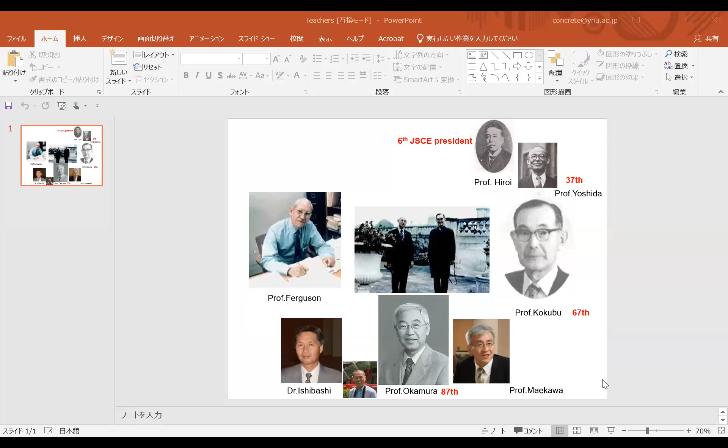I hope some of you have briefly read the journal paper written by Dr. Ishibashi. Today we will start studying his paper.

He has retired from the railway company, but he is still working as a special advisor for a railway consulting company. He was, or is, the top railway engineer. Professor Maekawa respects him too. He belonged to East Japan Railway Company, JR East, the biggest railway company in Japan. Now it's a private company, but before that he belonged to the National Railway, Japan National Railway.

He is also one of my teachers. I learned lots of things, philosophy, knowledge, and ways of thinking from him and his work. That's part of me. I also learned from Professor Okamura and Maekawa Sensei, etc. So you are learning those philosophies through me. He is Dr. Ishibashi.

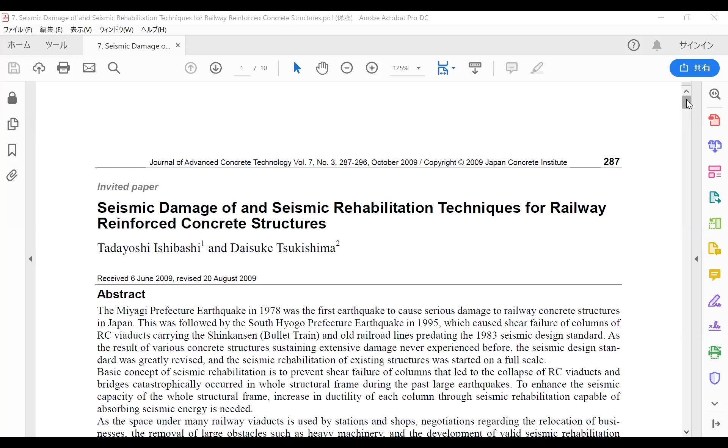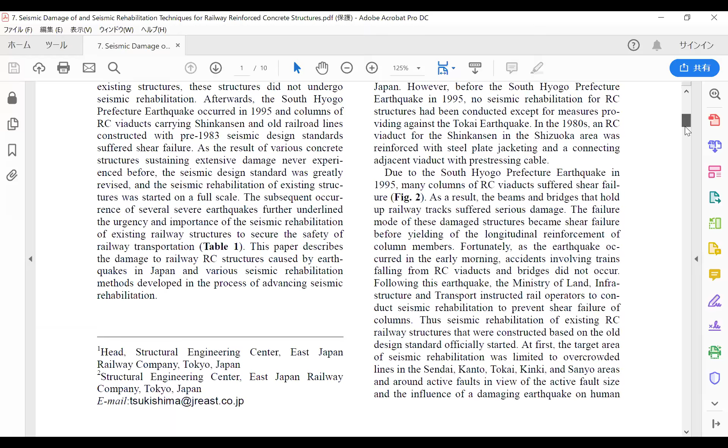Do you know Sendai? No, okay. So after Corona, COVID is settled, please visit many towns or cities. Japan has so many fascinating cities or areas. Please do not stay only in Yokohama. So Sendai is here, it's a kind of capital of the Tohoku area. So Miyagi Prefecture covers this area.

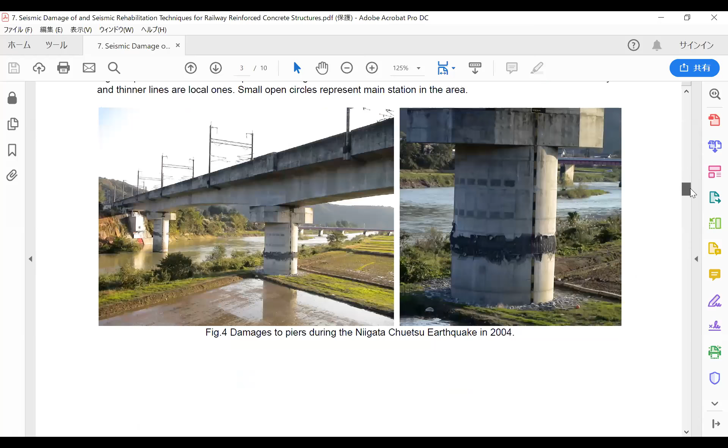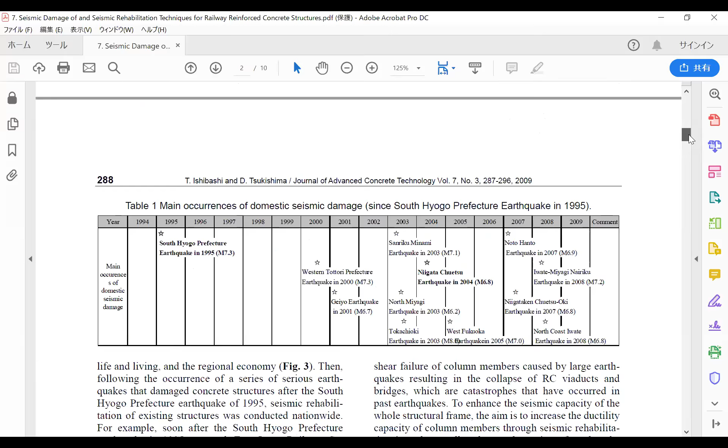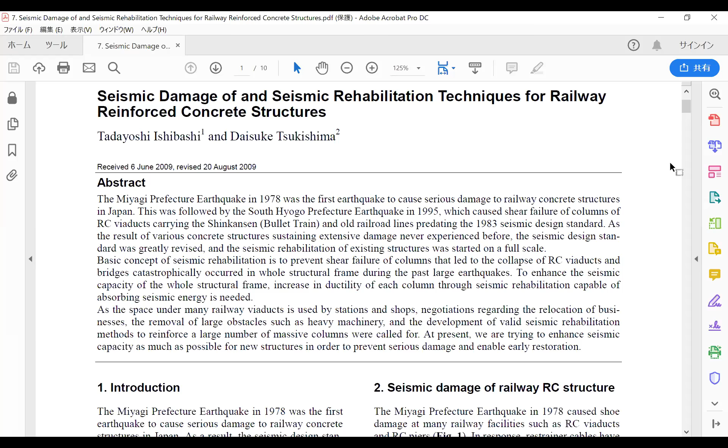Figure 1 is related to that information, the Miyagi Prefecture earthquake. So in 1978, at that time, Dr. Ishibashi was engaged in the construction of the Tohoku Shinkansen in this region. It was under construction, that's why he experienced this serious, severe damage at the site.

So he gradually accumulated knowledge about damage, how to repair, how to restore, how to improve seismic performance for new structures, etc. So he is a real engineer. Wichuda-san, go ahead.

This was followed by the South Hyogo Prefecture earthquake in 1995, with the failure of columns of RC viaducts carrying the Shinkansen bullet train and old railroad lines, predating the 1983 seismic design standard, as a result.

So this is the very famous Kobe earthquake in 1995. One of the very important keywords in this seismic design lecture is shear failure. Shear failure is a very important keyword, right?

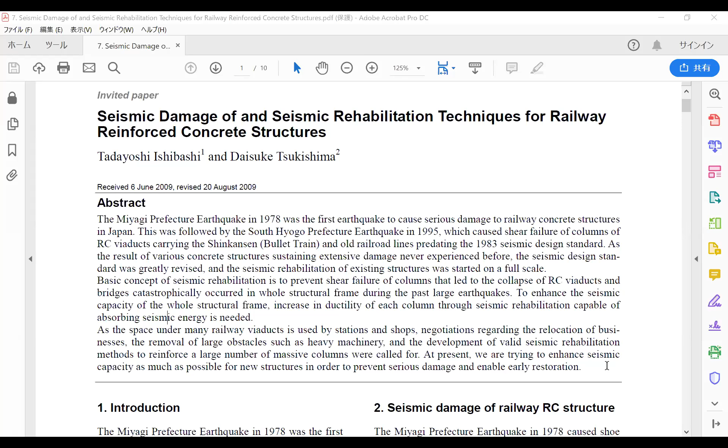As the space under many railway viaducts is used by stations and shops, negotiation regarding the relocation of businesses, the removal of large obstacles such as heavy machinery, and the development of valid seismic rehabilitation methods to reinforce a large number of massive columns were called for.

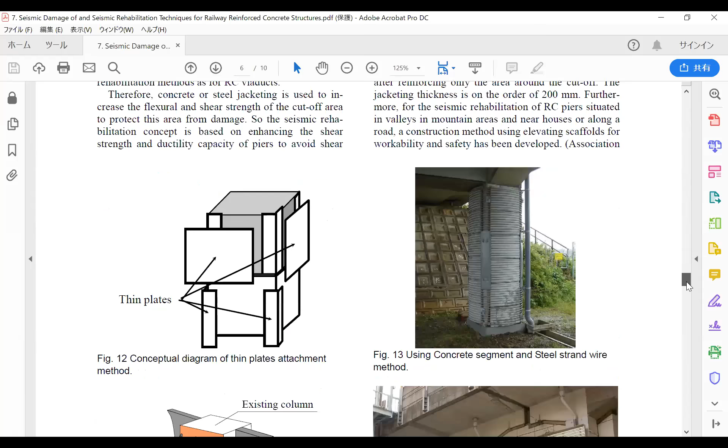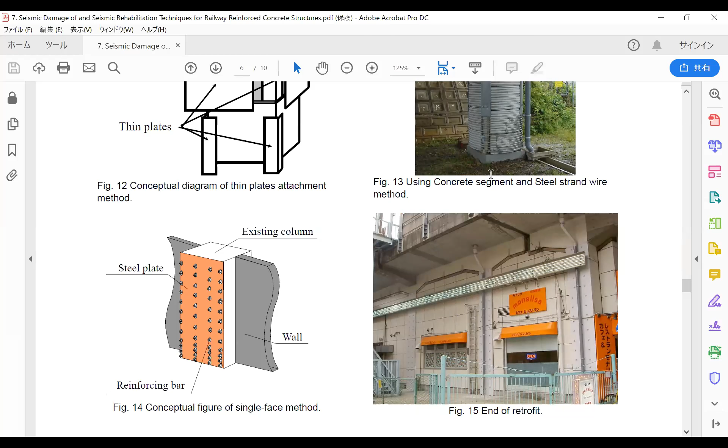So, for example, this kind of situation - it's not so clear, sorry. This is better, okay? I think you can find this kind of situation so often in Japan. The space under the viaduct, RC viaduct, is used for shops, etc. In this case, maybe a restaurant.

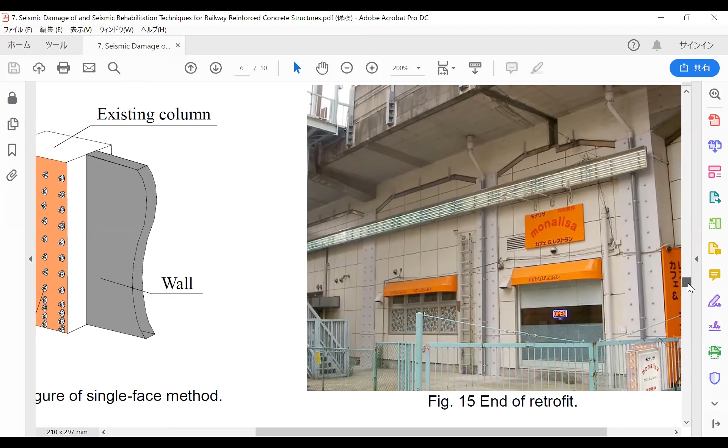Cafe and restaurant, Mona Lisa, open. So we cannot disturb the operation of these shops, that's why special techniques are needed. But it's a kind of typical Japanese way of thinking. For solving these practical problems, many techniques are developed. So I think it's a very typical Japanese situation.

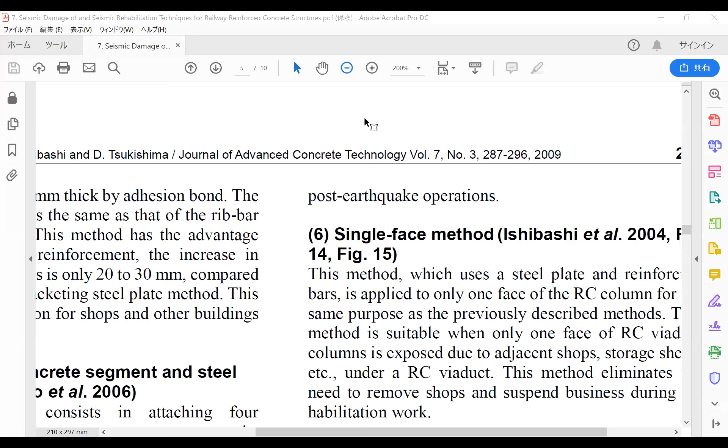The final sentence: At present, we are trying to enhance seismic capacity as much as possible for new structures in order to prevent serious damage and enable early restorations. So improved seismic design for new structures and seismic rehabilitation, retrofitting, are both treated, explained, or discussed in this paper.

Please try to learn as much as possible from this interesting and practical paper. Okay, can I go ahead? Or any questions so far?

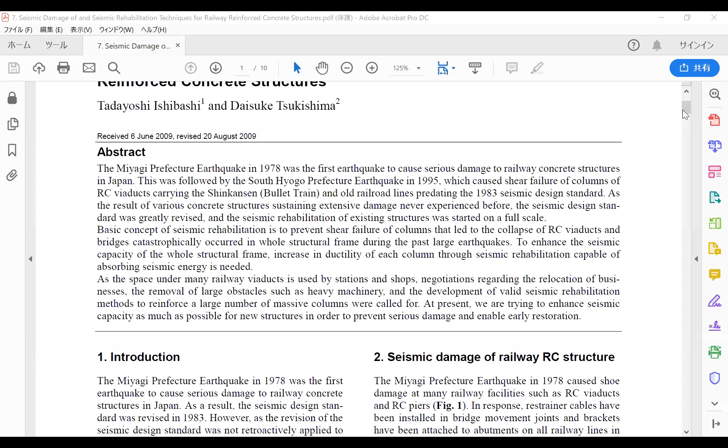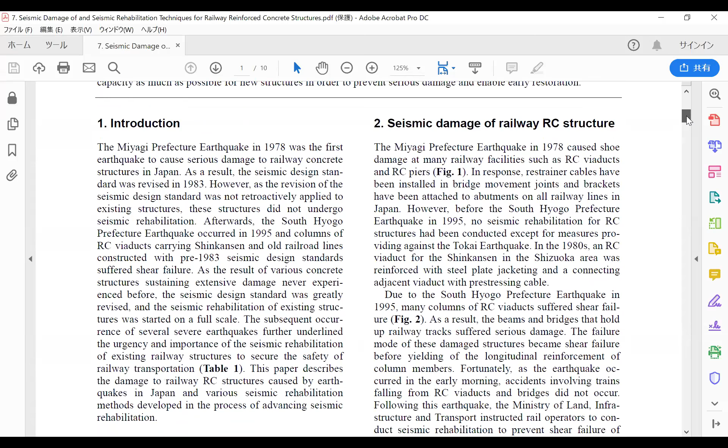1978 was the first big lesson for my civil engineers, or railway engineers. In Japan, you should bear in mind that the building engineering and building design code and road or railway engineering code are different. In this lecture, I will tell you the history of railway engineering, which is a bit different from building design history, but I think the basic concept is not that different.

In railway engineering, 1978 was a very big lesson from an earthquake. That's why the design standard was revised in 1983 - this was the first big revision in railway engineering. After that, in 1995, another very big lesson came from the Kobe earthquake, and we made a further revision.

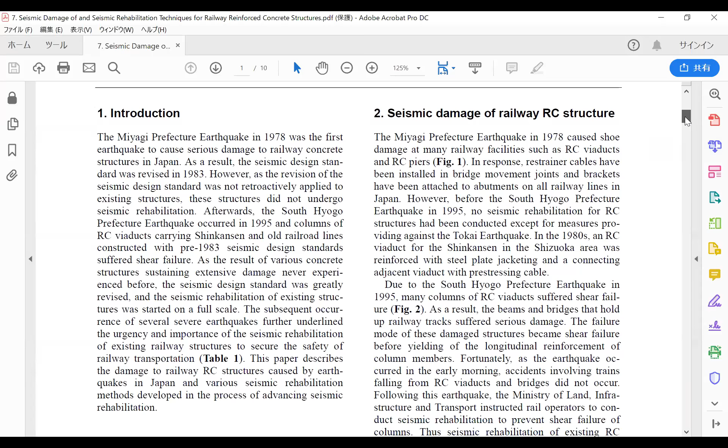Okay, so chapter 2, seismic damage of railway RC structure. Due to the Kobe earthquake in 1995, fortunately, as the earthquake occurred in the early morning, accidents involving trains falling from RC viaducts and bridges did not occur, as I explained to you.

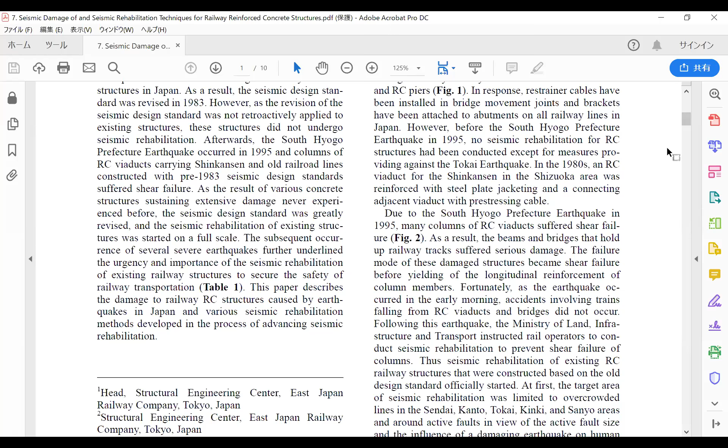Please read the first paragraph of chapter 2, about the Miyagi Prefecture earthquake. The Miyagi Prefecture earthquake in 1978 caused shoe damage at many railway facilities, such as RC bridges and RC piers.

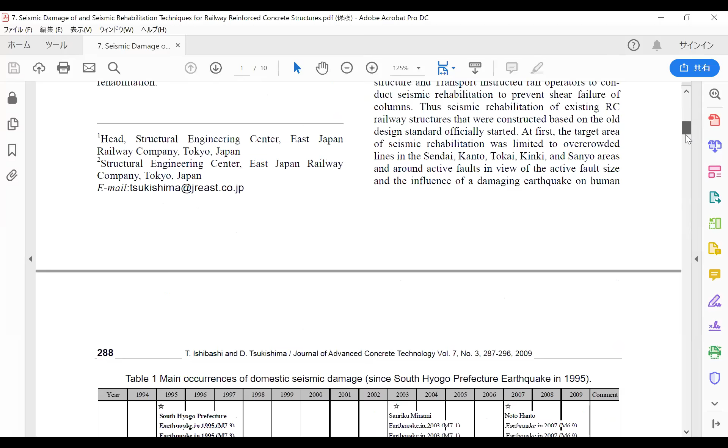This is a part of shoe, right? Part of support. I don't know the situation in other countries, but in Japan, especially in old structures, these metal devices were broken in the Miyagi Prefecture earthquake in 1978.

Do you know the reason? It's cast iron. Cast iron is very convenient to make any shape of device, but it's different from steel, it's brittle. That's why cast iron bearing devices, shoe devices, were broken.

So recently we never use cast iron. Is it clear?

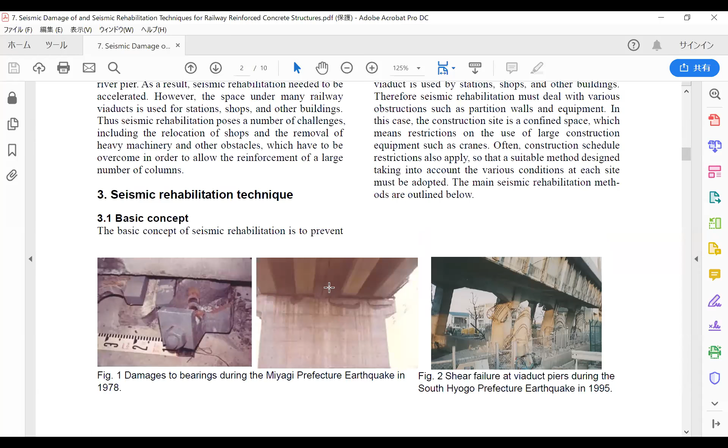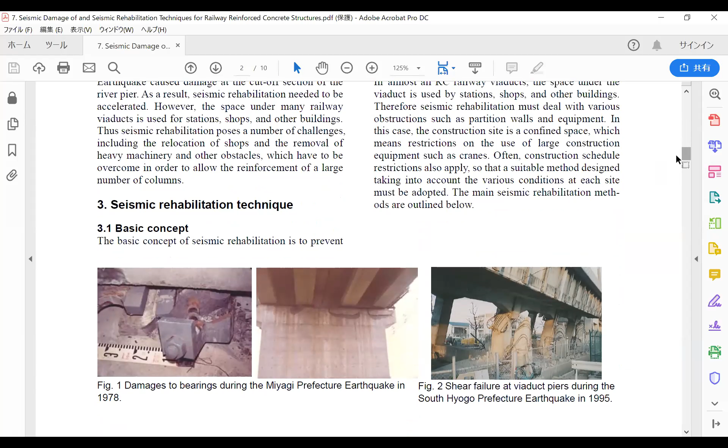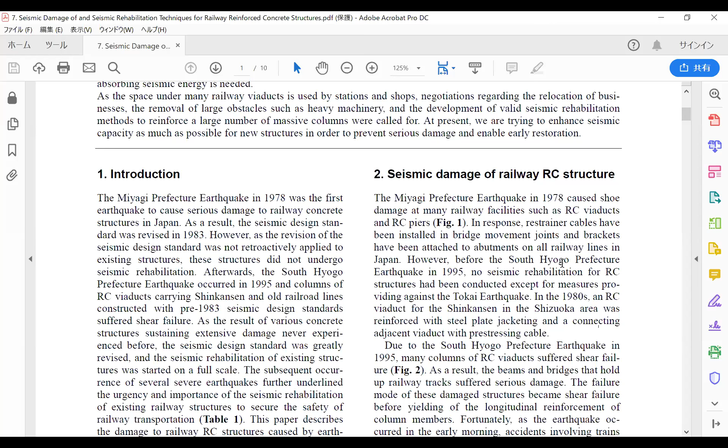In response, restrainer cables have been installed in bridge movement joints and brackets have been attached to the abutments on all railway lines in Japan. However, before the South Hyogo Prefecture earthquake in 1995, no seismic rehabilitation for RC structures had been conducted, except for measures providing against the Tokai earthquake in the 1980s, an RC viaduct for the Shinkansen in the Shizuoka area, which was reinforced with steel plate jacketing and connecting adjacent structures with pre-stressing cable.

Thank you. So many local names of cities, so it's a bit difficult for you, but if you're interested, please try to learn. Before 1995, almost no seismic rehabilitation had been done, except for some areas. Do you know Shizuoka?

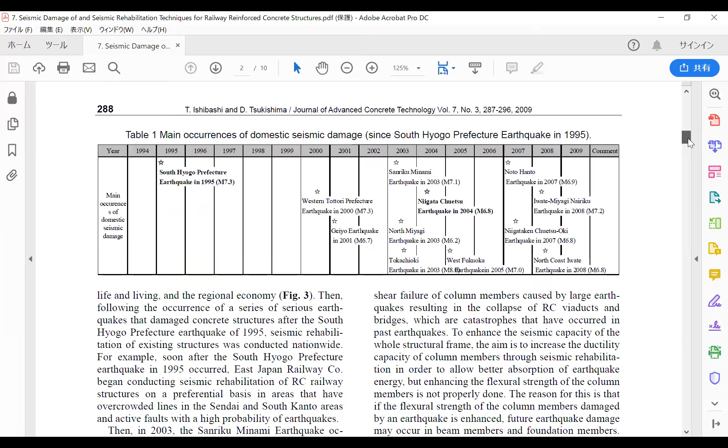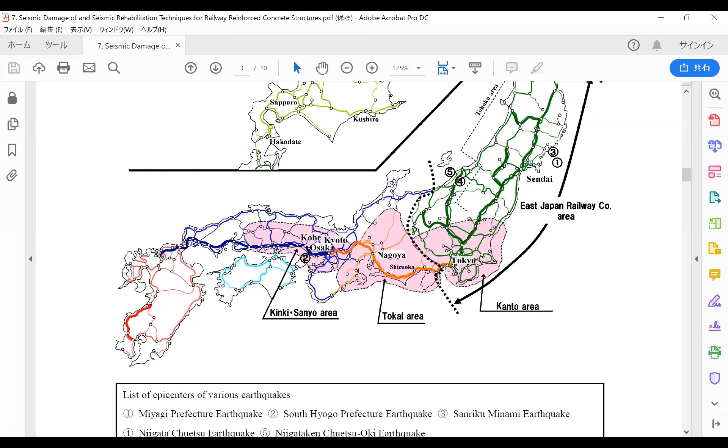Only near the Shizuoka area was seismic retrofitting conducted. Why? I showed the Google map. Please wait for a while.

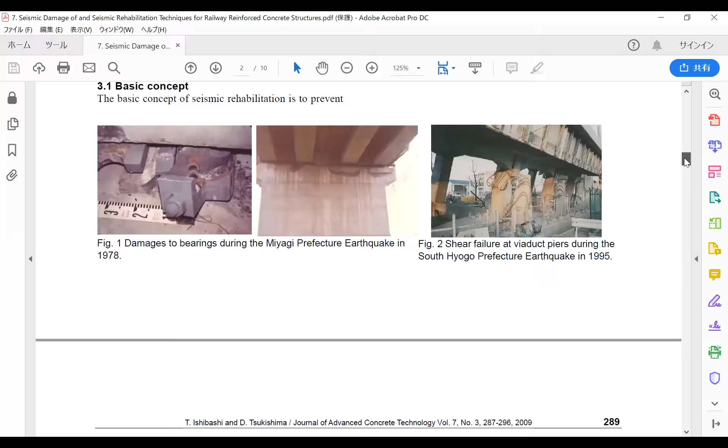Again, this area, the Shizuoka area, is on the Tokaido Shinkansen, the first Shinkansen connecting Tokyo and Osaka through Nagoya and Kyoto. This is the first Shinkansen.

Now you have a better knowledge. However, before the Kobe earthquake in 1995, no seismic rehabilitation had been conducted except for some countermeasures against the Tokai earthquake. In the 1980s, RC structures for the Shinkansen in the Shizuoka area were retrofitted, reinforced with steel plate jacketing.

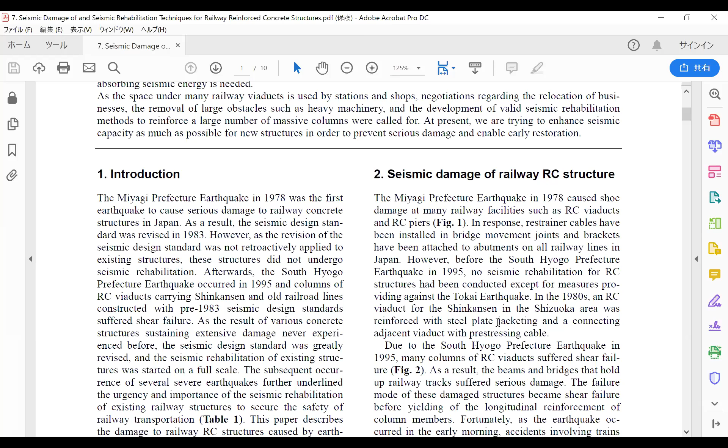So of course, many other conventional and local lines were in dangerous situations with the risk against earthquake. Very dangerous situation. So a bad design code, or a design code without sufficient knowledge, will cause this kind of non-resilient situation.

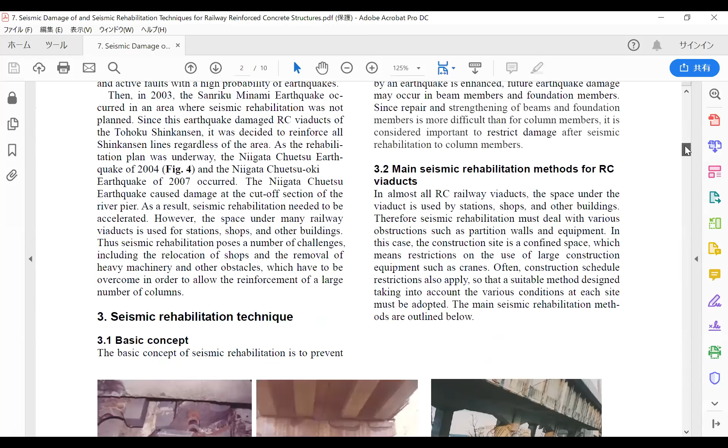Following the Kobe earthquake, the Ministry of Land, Infrastructure and Transport (MLIT), formerly Ministry of Transport, instructed railway operators to conduct seismic rehabilitation to prevent shear failure of columns. At first, the target area of seismic rehabilitation was limited to overcrowded lines in Sendai, Kanto (Tokyo area), Tokai, and Kinki (Osaka area), etc.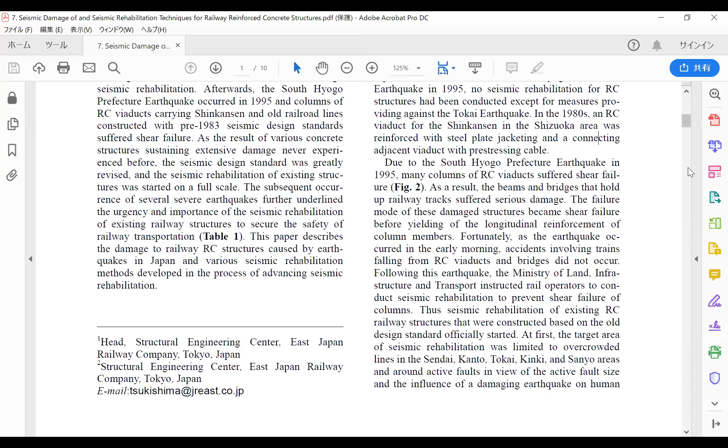It takes time. After that, in 2003, eight years after the Kobe earthquake, another earthquake happened, in a local, rural area. Actually, at that time in 2003, I was working for a railway company, so I experienced this earthquake as a railway engineer.

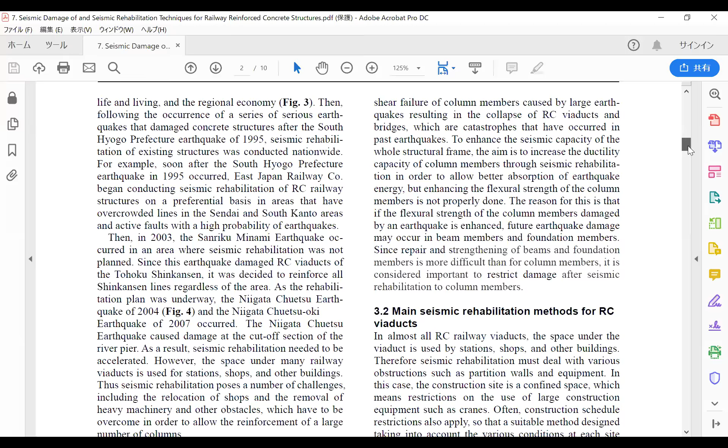Where is this earthquake? This one, number 3, the Sanriku Minami earthquake, happened in 2003. It's away from Tokyo, away from Sendai, but severe damage happened in a local area.

We should understand that railway, especially railway, different from roads, is a line infrastructure. So when some portion, some points, are damaged, the line doesn't work. But the railway company, JR East, recognized that not only city areas, but all the structures should be retrofitted. Otherwise, railway infrastructure as a line doesn't work appropriately. That's the decision.

That's a very big decision for moving toward a resilient country.

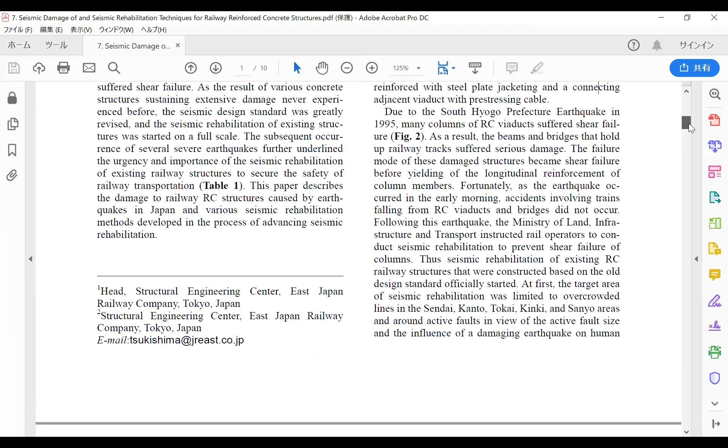That's the rough history of seismic retrofitting. It's step-by-step retrofitting, but we are still continuing now.

So I will finish this explanation by adding one more piece of information. As you remember, the big earthquake in 2011, March 11, nearly 10 years ago, damaged almost all the coastal lines in eastern Japan, both by earthquake and tsunami. I almost believe that without those retrofittings, very many structures must have collapsed. It's a kind of nightmare.

We could be in time. We could avoid very severe collapse of RC viaducts. That's a kind of result obtained by civil engineers' efforts. Again, we learned so much from the Kobe earthquake.

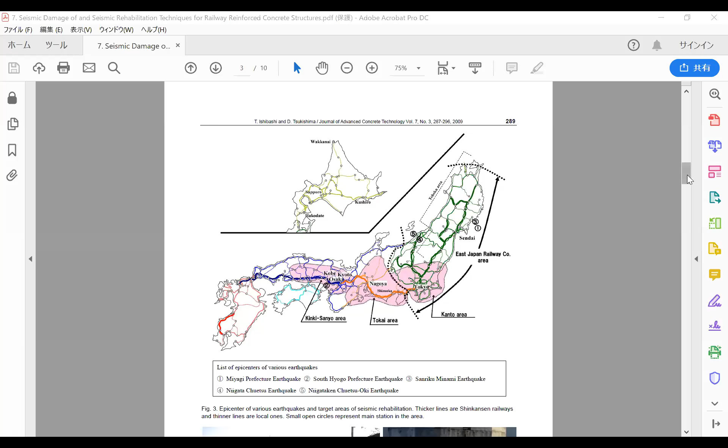Any other question? Okay, let's go ahead.

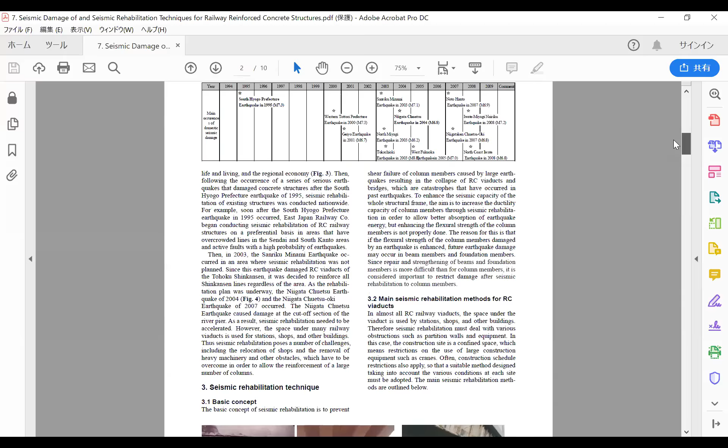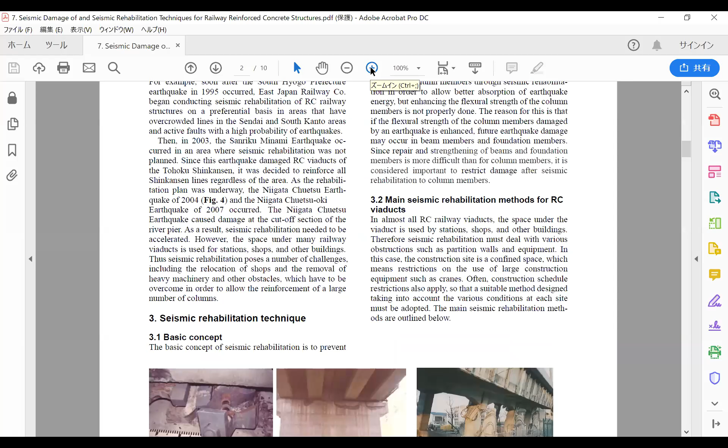Please read this part: Basic concept for seismic rehabilitation, section 3.1, Basic Concept.

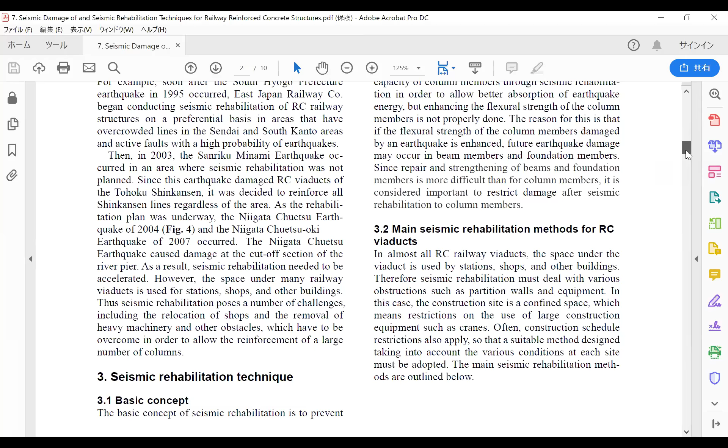The basic concept of seismic rehabilitation is to prevent shear failure of column members caused by large earthquakes, resulting in the collapse of RC viaducts and bridges, which are catastrophes that have occurred in past earthquakes. To enhance the seismic capacity of the whole structural frame, the aim is to increase the ductility capacity of column members through seismic rehabilitation, in order to allow better absorption of earthquake energy. However, enhancing the flexural strength of the column members is not properly done.

The reason for this is that if the flexural strength of the column members damaged by an earthquake is enhanced, future earthquake damage may occur in beam members and foundation members instead. Since repair and strengthening of beams and foundation members is more difficult than for column members, it is considered important to restrict damage after seismic rehabilitation to column members.

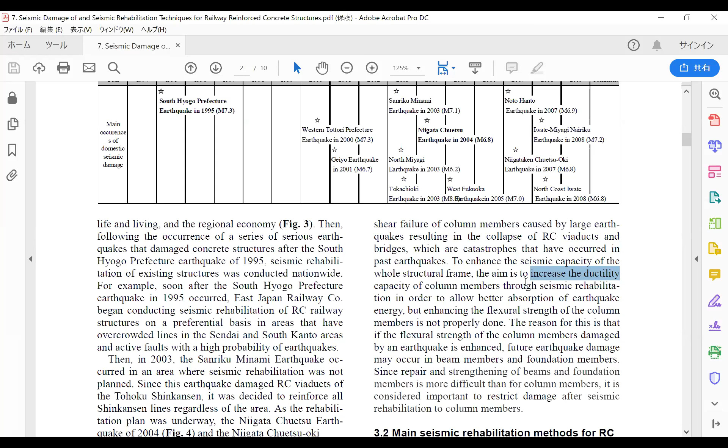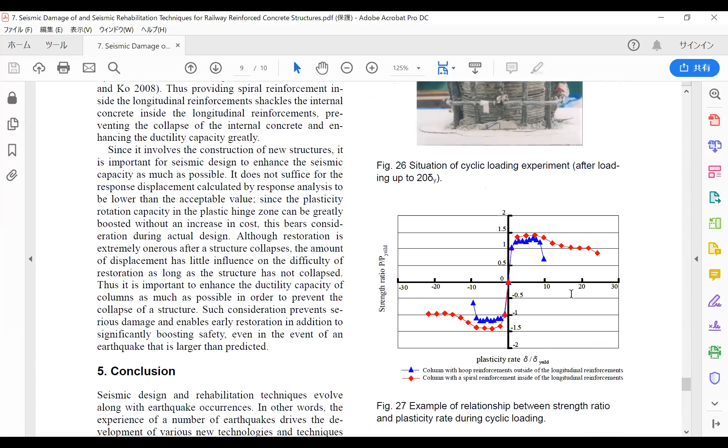Okay, let's start from this one. What's ductility? We should jump to the final figure. You can see figure 27. I'll explain, let's magnify the figure. So, what's this figure?

Vertical axis is strength ratio, P over P yield. What's horizontal axis? Plasticity rate, delta over delta yield.

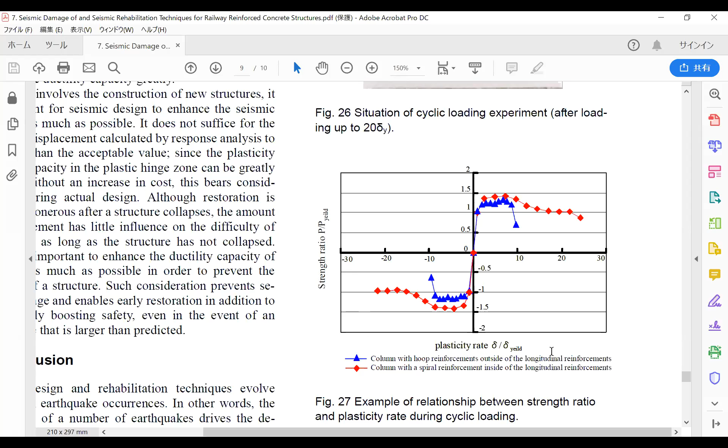Have you seen the column test? Where is it? Today I cannot use the whiteboard, so... it's a bit difficult to explain.

I have not shared this PowerPoint file yet, but sooner or later I will share it. Can you see this PowerPoint file? Okay, so this is a column.

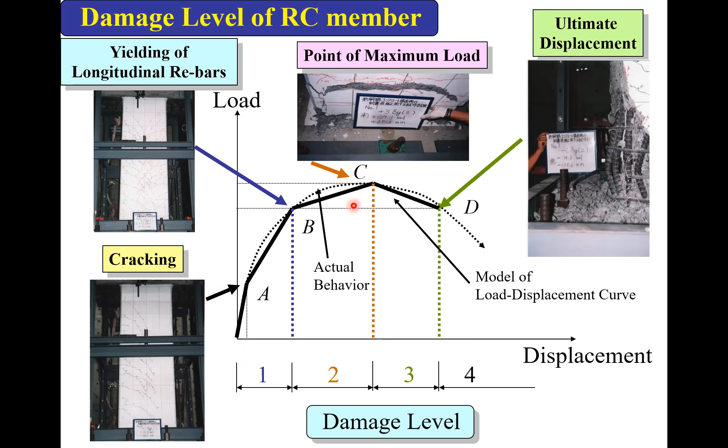I'll go back. This is again the load-displacement relationship, but it's normalized by yielding load and normalized by yielding displacement.

The red one is showing a larger displacement, so higher ductility. This is again the load-displacement relationship. So this area is showing the seismic energy absorption performance. The reinforcing bar is already yielded, but by this large deformation, seismic energy, earthquake energy can be absorbed. This is ductility.

Shear failure can happen like this. Without showing ductile behavior, shear failure suddenly happens, sometimes before reaching yielding load. So in this graph, before reaching 1.0, at around 0.7 etc., it suddenly fails in shear. So almost no energy absorption. It's very brittle and very dangerous.

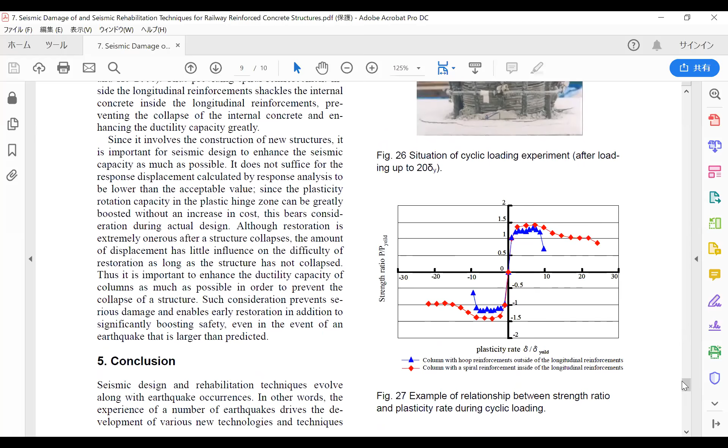Now, do you have some image about ductility? Okay, I'll go back.

You said in the column test - is it just axial load plus combined with something else? Yes, sure, we should apply the equivalent axial load. And how about horizontal? Both combined together, of course.

The axial load is kept constant. The horizontal displacement is gradually increased, applied to the column like that - this is the reverse cyclic loading, something like that.

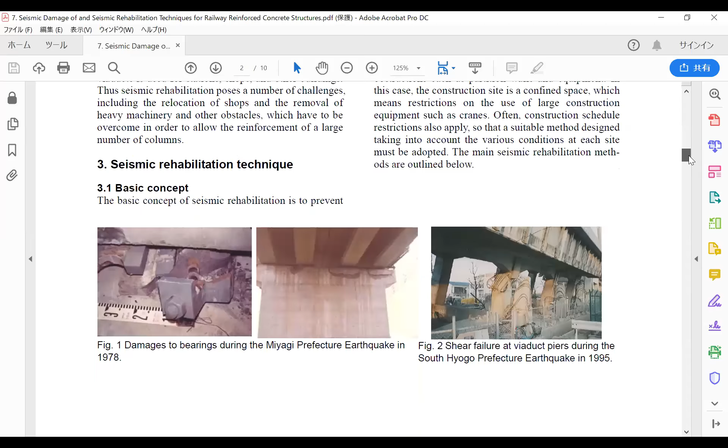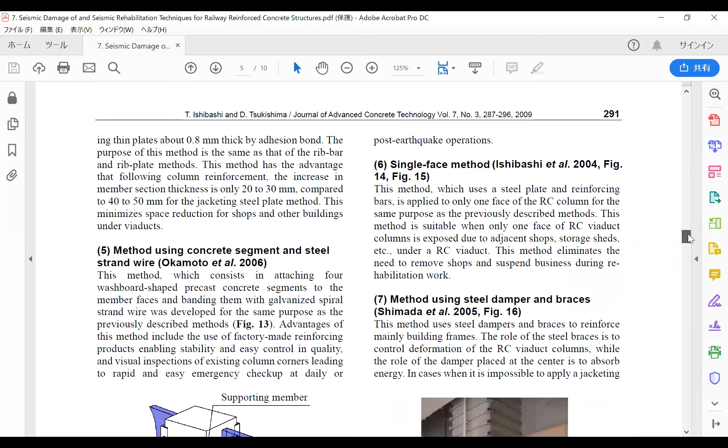Compared to that rib-bar method, this steel plate jacketing method is more common. It's also used to increase shear capacity. It's different from reinforcing bar, but these steel plates cover the original RC column.

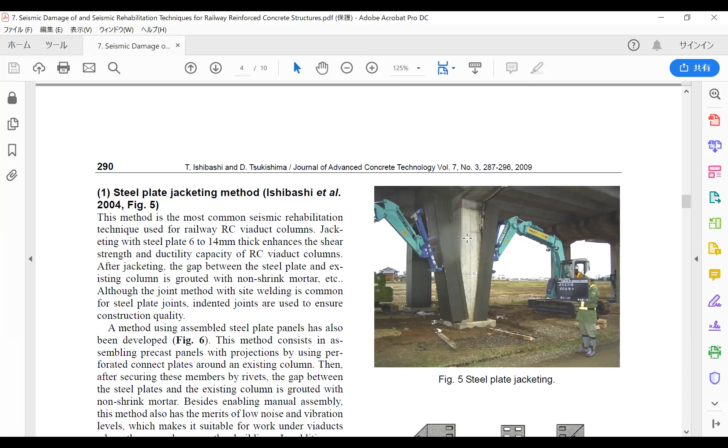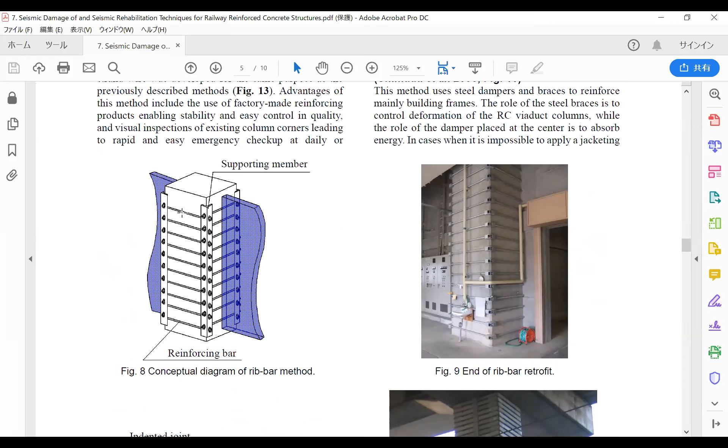But it's similar to the rib-bar method, right? It's discrete, separated steel, but if you connect it all, it will be like a steel plate. You can find construction machinery for this. Steel plate is very heavy, so in open space utilizing construction machinery, you can use the steel plate jacketing method.

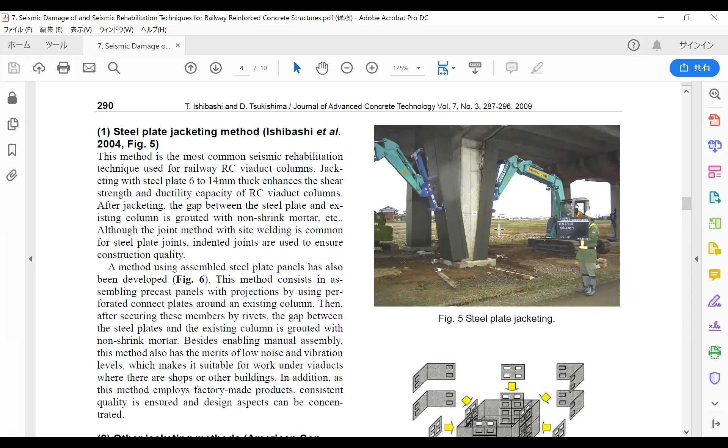But here there's a wall, so it's very difficult to break or demolish all this concrete wall. That's why only small holes are made, and reinforcing bars are manually installed, then tightened at the corners. For solving this kind of difficult situation, the RB method was developed.

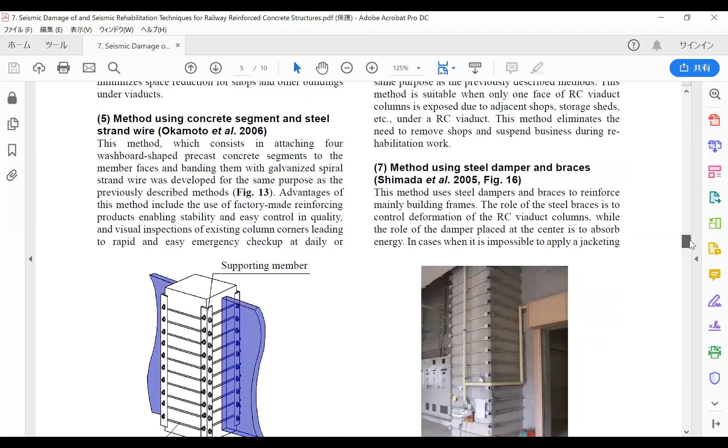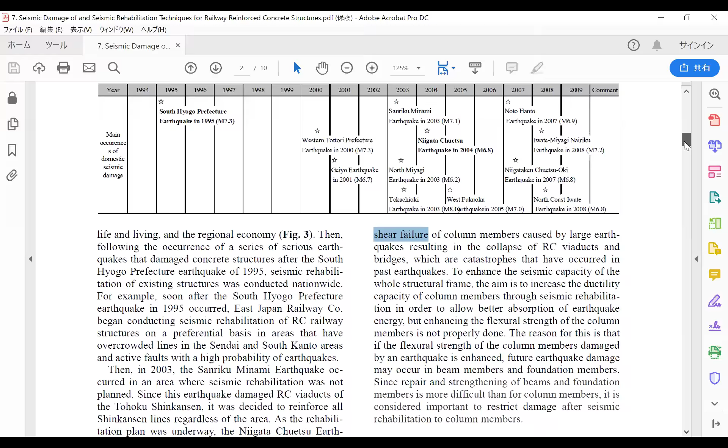This is the explanation about how to prevent shear failure. So, do you have any question?

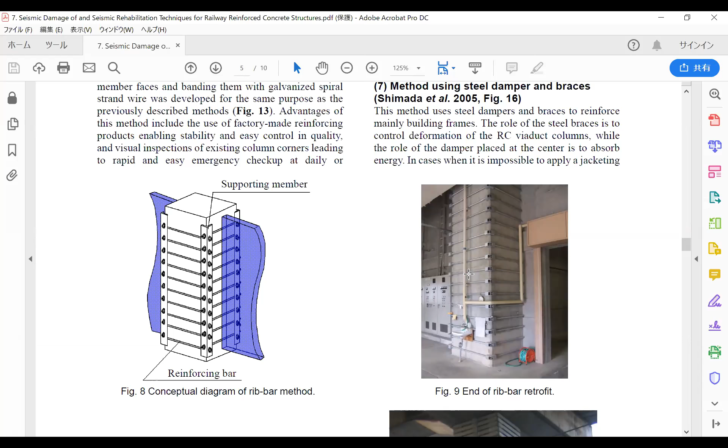Sensei, were carbon fibers also utilized as shear reinforcements? Yes, it's just like the steel jacketing method. Carbon fiber is one of the FRP sheets, and one of its merits is lightness.

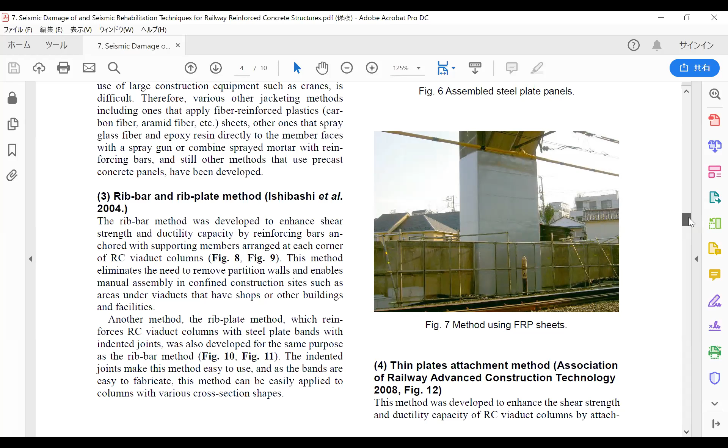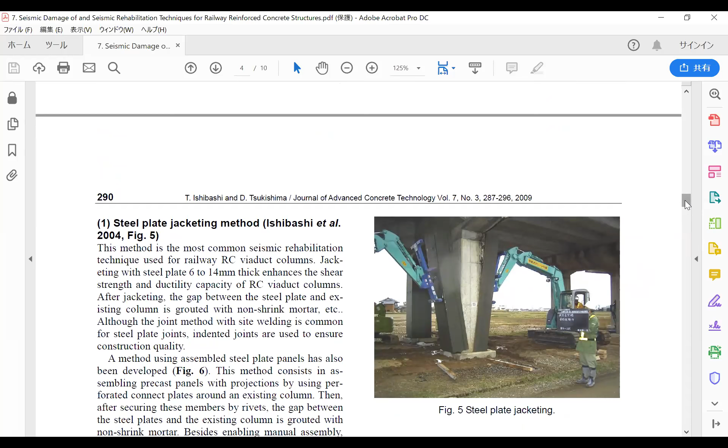So anyway, by utilizing those methods, shear strength is increased to prevent shear failure. We will go back to that important paragraph.

Next important aspect is this one. As I told you, shear failure should be prevented, but enhancing flexural strength should not be done. Again, flexural strength should not be increased or enhanced. Do you understand? Let's go back to steel jacketing.

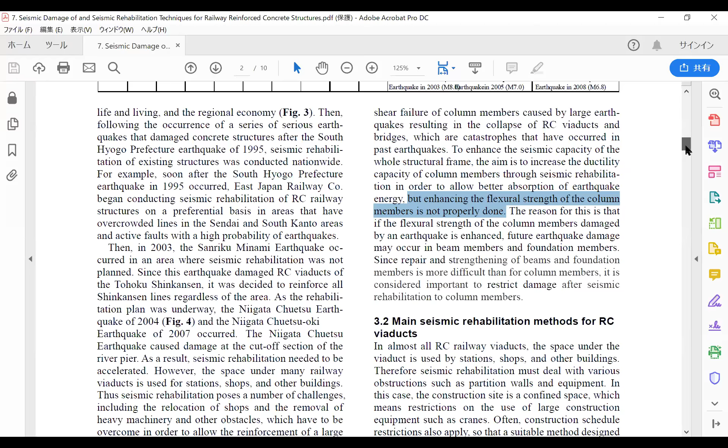Please observe precisely the length of the steel plate, from here to here. If the steel plate is longer than this, for example if the bottom of the steel plate goes much lower, into the underground part, what will happen? With longer anchorage, this steel plate will act as a reinforcing bar, like a longitudinal main reinforcing bar. Is it clear?

If so, flexural strength is also increased. If you have some fundamental knowledge about reinforced concrete, it's clear, I think. So Dr. Ishibashi, the author, is saying that should not be done.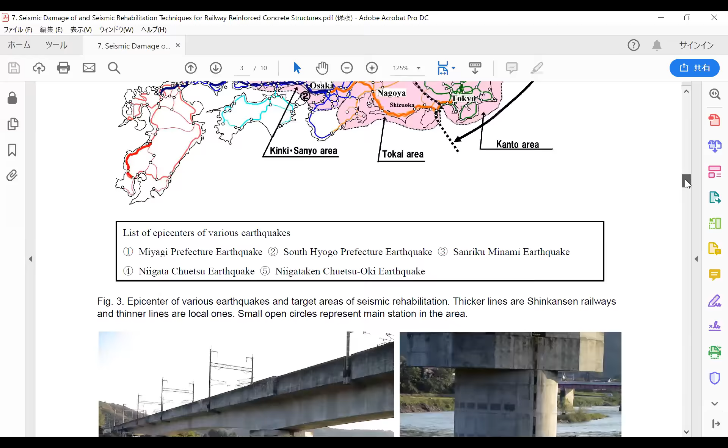This is a very important point. The reason for this is that if the flexural strength of the column members damaged by an earthquake is enhanced, future earthquake damage may occur in beam members and foundation members. So this sentence is saying that the damage should be concentrated in column members. Column members should be damaged, the author says, otherwise the foundation or beam will be damaged.

It's very easy to understand how difficult it is to repair, restore, or inspect damages of the foundation—you need to excavate, it's almost impossible. And also if beam members are damaged, it's very difficult because the tracks are also severely damaged.

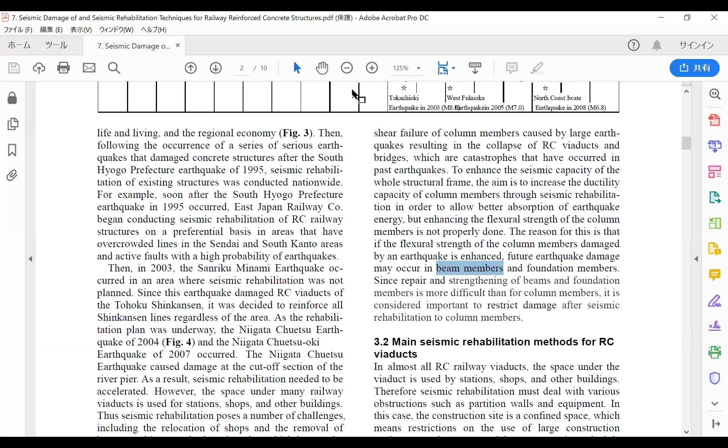Again, flexural strength of these columns should not be enhanced. Otherwise beams will fail, or even though you cannot see the foundation, it can be damaged. We should avoid such kind of difficult damage to restore. So, I like this philosophy.

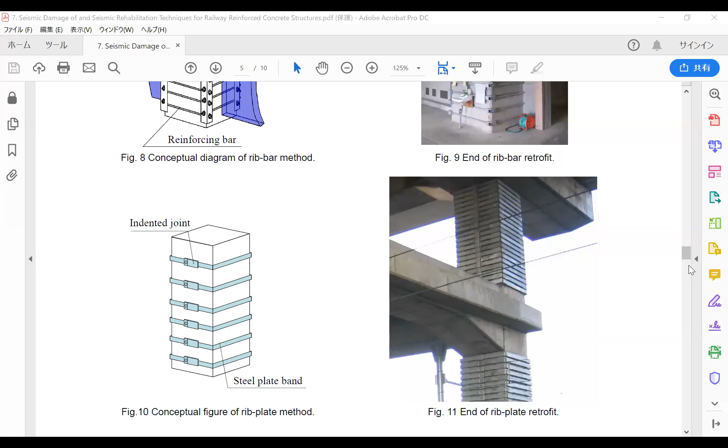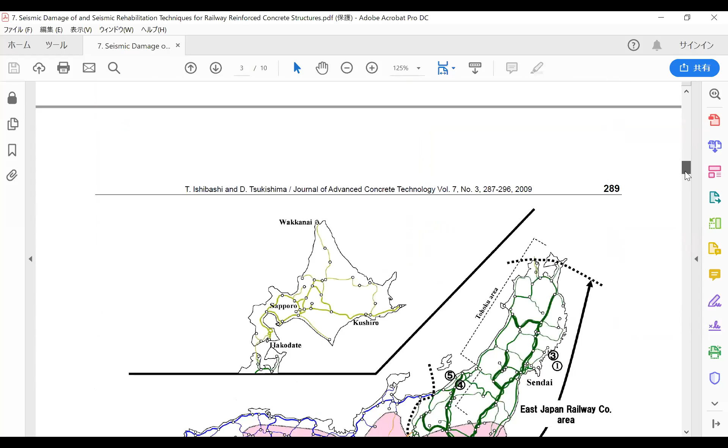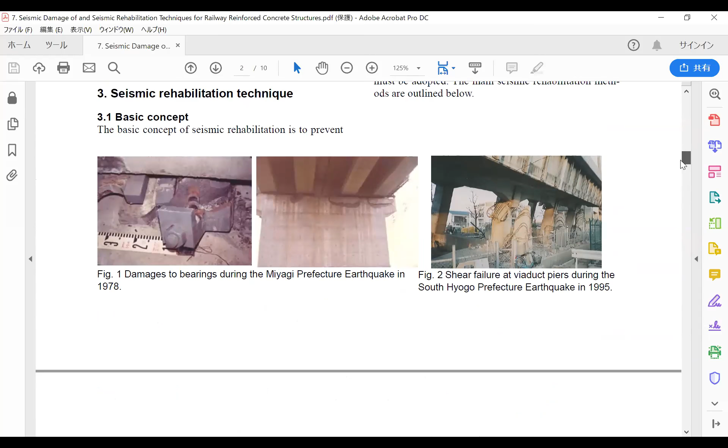Sensei, I have a question. In the paper, I see in figure 2 and figure 4 that the collapse in figure 4 happened in the middle of the column, but in figure 2 it's at the top of the column, which is connected to the beam. Is there some reason for that?

I see, sorry, this is a bit difficult to identify what happened in figure 2. It's not the top. I want to use the whiteboard, but wait, maybe I should use a different picture. Can you see this PowerPoint file? Yes, which will be shared later.

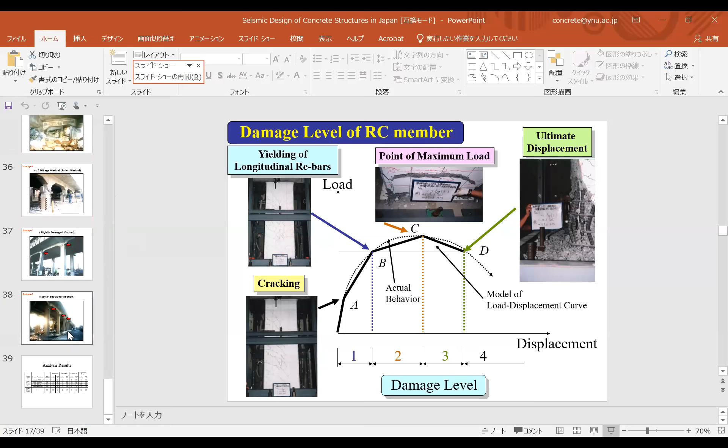Yes, can you see this one? So maybe this slide is better for you to understand.

RC columns are severely damaged by shear failure, shear like that. As you pointed out, it's nearer to the top of the column. There must be a reason - there is a reason. It's near the hinge point, but it's known that the shear capacity is decreased in the hinge portion due to the effects of bending, crack, etc.

So maybe I will explain it in the next class in January. And anyway, in this real structure, shear failure happened here. But I should show another bit.

It depends on the original design. In this case, the shear strength near the middle of the column was very low. That's why shear failure happened here. So it depends on the strength.

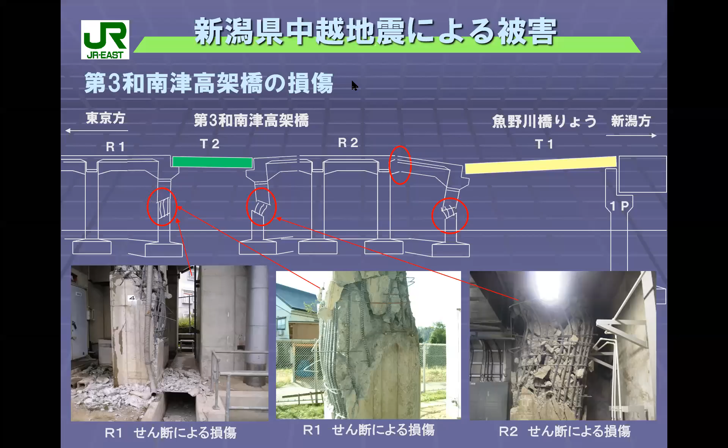So that's one of the answers to you. I need to add one more information, sorry - figure 4. This one, you asked about this damage also, right? All right, can you see? Yes. So there's a clear reason why damage is concentrated in the middle. This is also explained in January, but some of the main reinforcing bars are cut here.

Cut, because for this column, moment distribution will be like that. Near the top, moment is nearly 0 because there is a support here - this is a simple column. So bending moment becomes maximum at the bottom, right? That's why near the upper portion, reinforcing bars are not necessary. So that's why some of the longitudinal reinforcing bars are cut here. Do you understand?

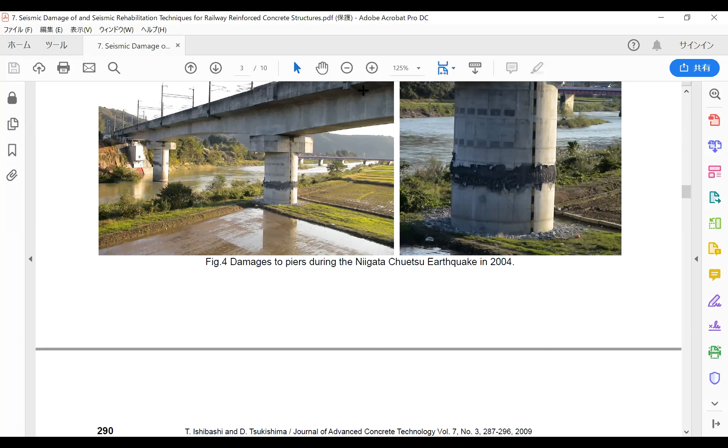Oh yes, I know, so that caused this damage. I'll explain more in detail in January. Okay, I know, so it's related to the reinforcing bars. Thank you, Sensei.

So your question is very important, very nice. It's not so easy to explain the cause for each damage, but each damage has its own reason, right? So if you can explain why this kind of damage happened here or there, it means you understand deeper, right? So it's very important to have interest in such matters. Very nice question.